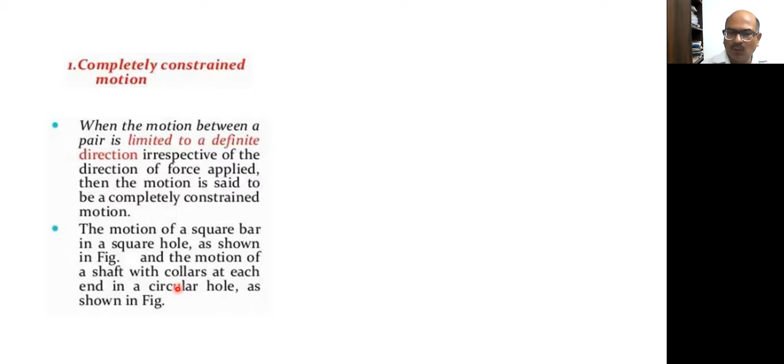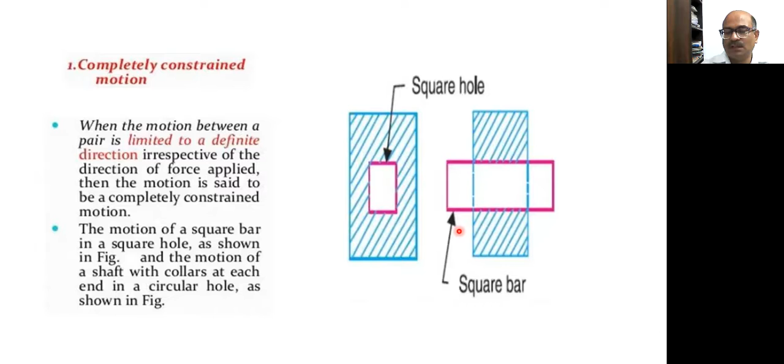If an object is there, but the motion between those pairs is limited to a definite direction irrespective of the direction of the force applied, whatsoever force we apply, that object will move only in the direction in which it is fitting, like this pen example. If I am fitting this cap on this pen, whatsoever the direction of force, the motion of the cap on the pen will only be in this direction. That kind of restriction is called completely constrained motion. For example, the motion of a square bar in a square hole, as in the figure. The square bar can only move to and fro in this direction; it cannot rotate, because it is confined by the shape of the hole. So restrictions are available, but motion is possible, limited to a definite direction.

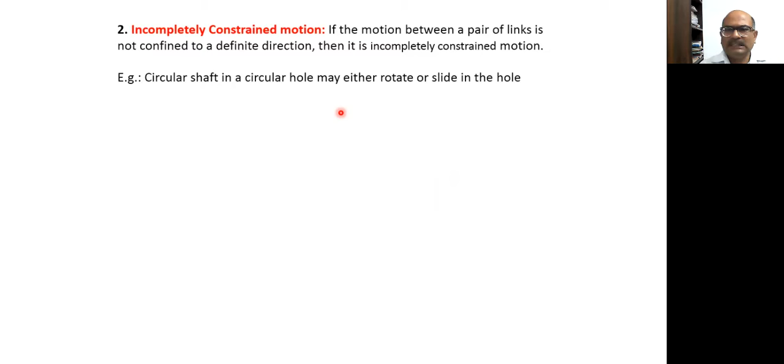Now, incompletely constrained motion is when the links are not confined to a definite direction, like a circular hole with a shaft put in it. You can understand that if the circular hole is available, the shaft can rotate and also move in this direction. This type of motion is known as incompletely constrained motion, but it is restricted in this direction because the shaft cannot move here and there, though it can move to and fro as well as rotate.

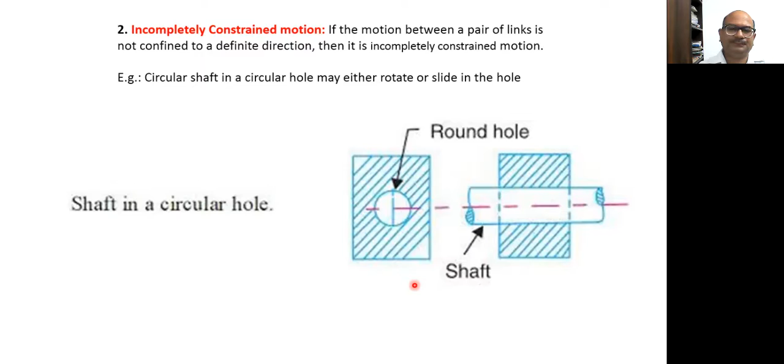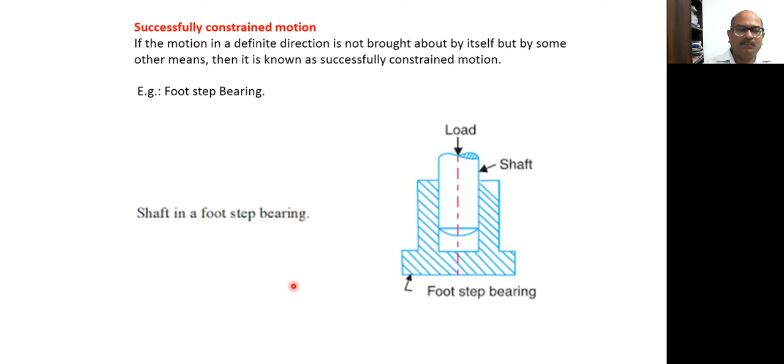The constrained motion, what we have come up to, is that there are certain restrictions due to which the object's motion can be controlled, and the motion in one direction or the other can be seen accordingly.

Now, according to the directions available and the possibility of movement of that object, we can define a very important parameter known as degree of freedom. These are the minimum number of independent variables or coordinates required to specify the position of a dynamic system. You must understand this.

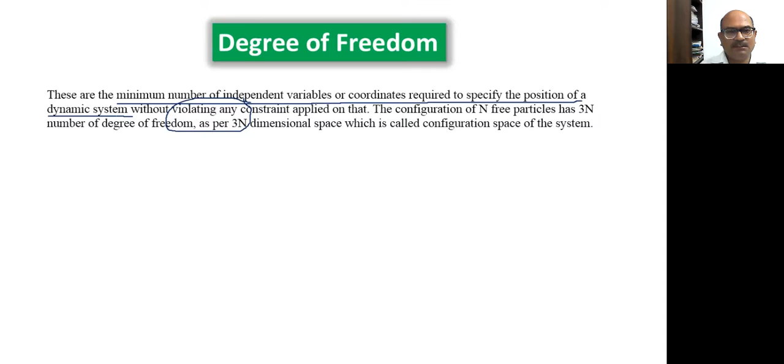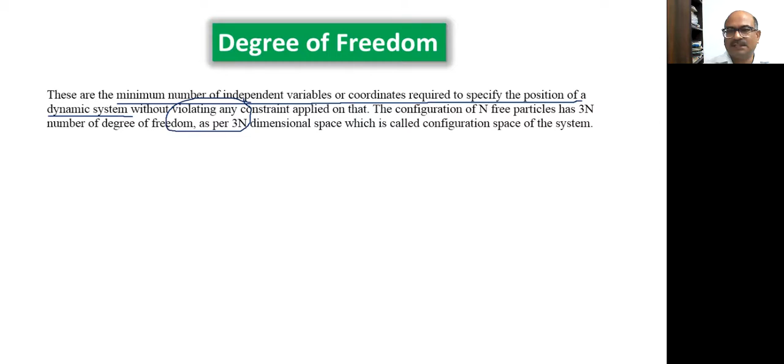So these things you must identify. The condition is without violating any constraint applied on that system. The configuration of n free particles has 3n degrees of freedom as per their 3n dimensional space, because if one particle is available, there are 3 directions available, so there is 3 dimensional space available for that. One particle can move in those 3 directions, but if n number of free particles are available, they can move in 3n space, which is known as the configuration space of that system.

How many particles are available accordingly identifies the configuration space. The number of coordinates required to specify a dynamical system becomes less when any constraint works on that system, because suppose we are restricting the motion of a particle in the x direction - the particle cannot move in x direction, though x direction is available. So there are only y and z directions available. There are restrictions, and accordingly the degree of freedom is reduced.

So we can define degree of freedom of a dynamical system as the minimum number of independent coordinates required. This is an important part - degree of freedom of a dynamical system as the minimum number of independent coordinates or parameters required to specify the system with constraints.

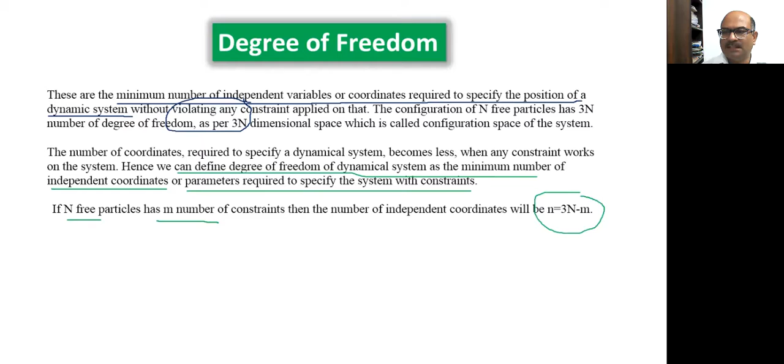And if n free particles have m number of constraints, the independent coordinates will be 3n minus m. So 3n is the total number of available spaces, available coordinates, available parameters in which a particle can move, and small m is the restrictions available. Accordingly, the total number of free spaces are reduced. For example, a particle in space has degree of freedom 3.

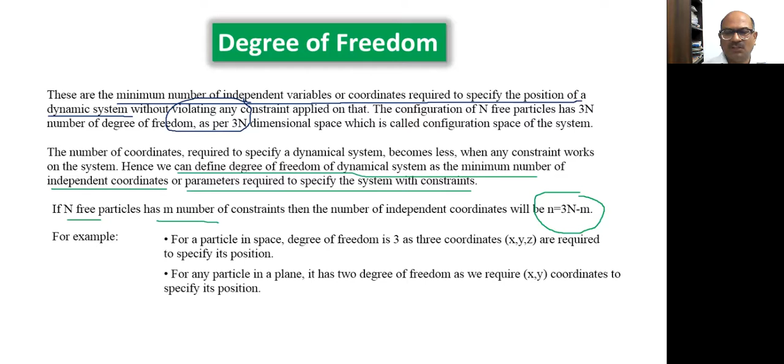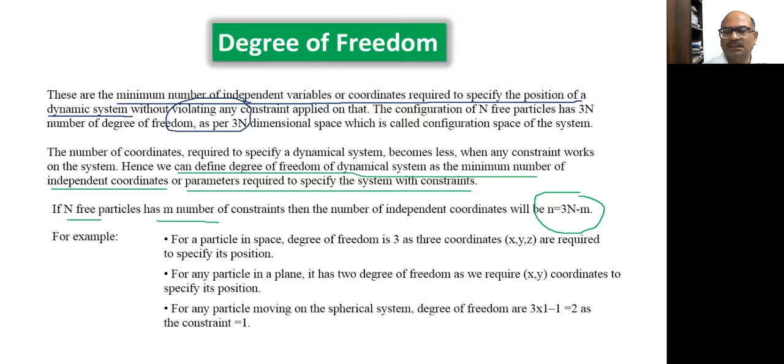For any particle in a plane, it has 2 degrees of freedom because the third parameter is restricted. So 3 minus 1 is 2. But for any particle moving on a spherical system, degree of freedom is 2 as the constraint is 1, because on the spherical system it cannot increase or decrease its radius. The restriction is available on the distance of that particle from the center.

We can understand this in an important manner - if the particle is here, where can it move? The particle can go up and down, left or right, backward and forward. It can roll, it can take a pitch, and it can take a yaw. So let me identify what all these things are with one example.

I hope you are seeing this pen. If we consider this as an object, if the motion being considered - it can move right and left like this, it can move this way, this way, this way. So this is a simple motion.

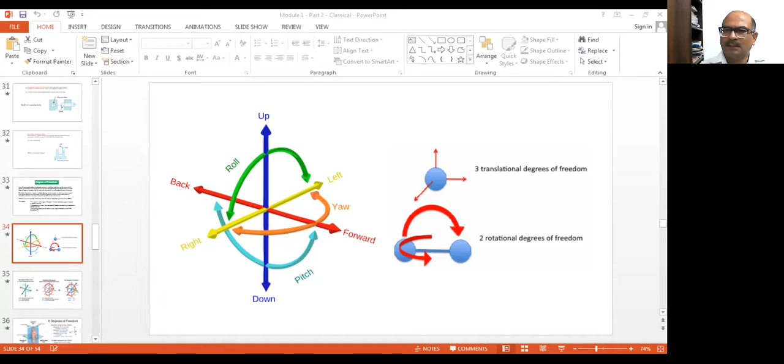Already we have seen this, and we can understand that if a particle is at the center, it has three translational degrees of freedom, like this movement, and two rotational degrees of freedom. One is like this, and one is like this.

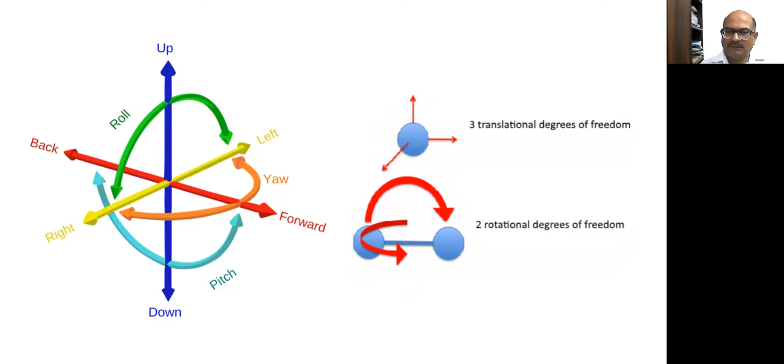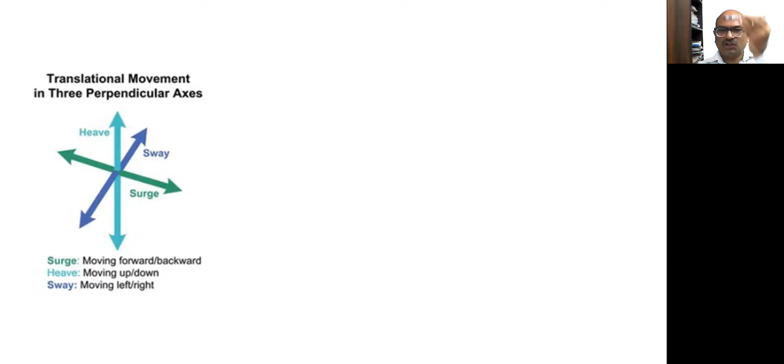If we see the translational movement in three perpendicular axes, it can be taken as surge, moving forward and backward; heave, moving up and down; and sway, moving left and right. Consider this the translation movement in three perpendicular axes: surge is moving forward and backward, heave is moving up and down, and sway is moving left and right.

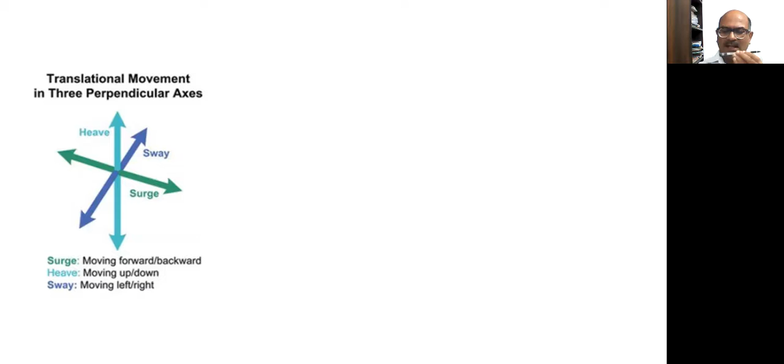In addition, there are rotational movements about three perpendicular axes. Rotational movement in this direction, this direction, and this direction. If the rotational movement is like this, it is available here, so if it goes in this direction, it is rolling. If it moves rotationally at that axis, it is pitch, and if it is like this, it is yaw.

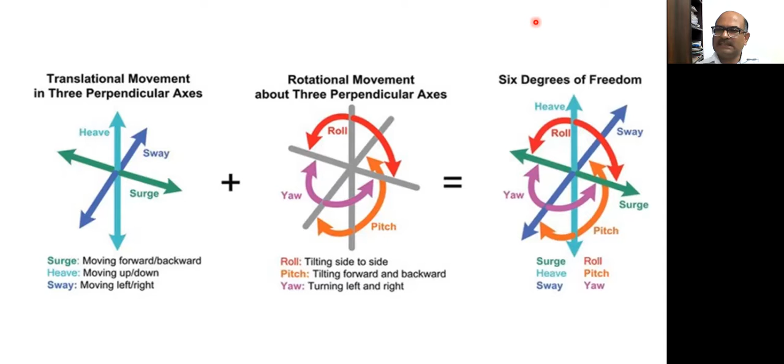Rolling is tilting side to side, pitch is tilting forward and backward, and yaw is turning left and right. This way you can understand there will be 6 degrees of freedom available.

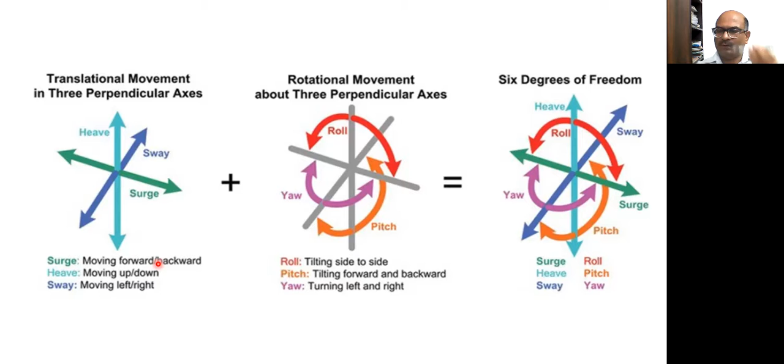Three for surge, heave, and sway. There is no rotation available here, so 3 degrees of freedom here, and 3 degrees of freedom for rolling, pitch, and yaw. This way we can make out the degrees of freedom.

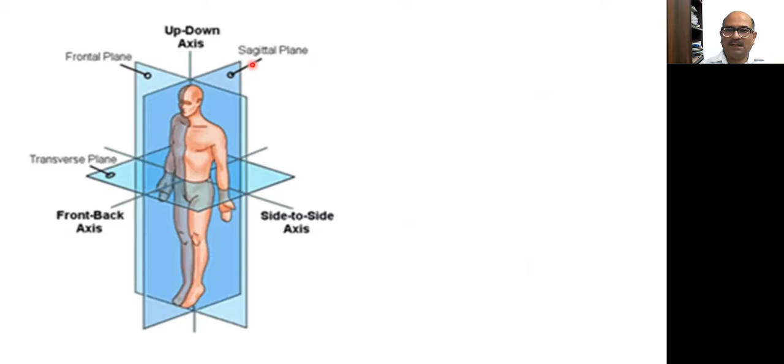For the human body, if we consider the up-down axis, side-to-side axis, and front-back axis, we are having a transverse plane, a frontal plane, and a sagittal plane. Accordingly, we can define movement along an axis, 3 degrees of freedom: along the side to side axis, along the front back axis, and along the up down axis.

It can take like this, and like that movement. That kind of movement along the 3 axes is available, and because it is a linear movement, this distance can be measured in inches, feet, or meters as the unit of distance.

If we rotate standing over there, again 3 degrees of freedom are available. If it moves around the side-to-side axis, bend forward, backward; around the front-back axis, side bend; and around the up-down axis, open closed. So this is angle, because it's an angle, measured in degrees or radians.

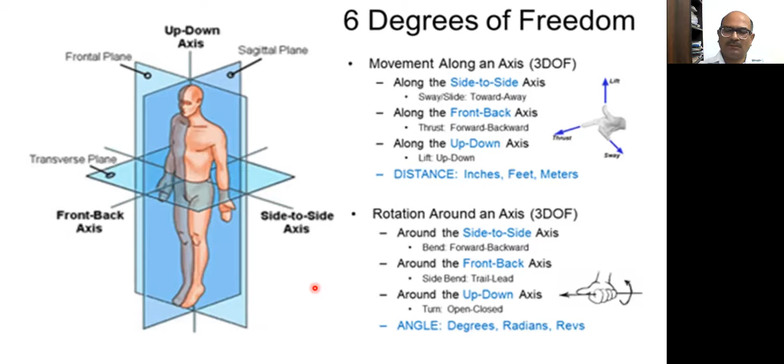As the unit. So in the same manner, we will be having 6 degrees of freedom, and in the same manner in our hand, let's see how you can move your hand.

If you see your finger, it is available to move only in this movement, this or this—it can rotate, but it cannot rotate here. So you can rotate from here, but not the finger itself. Same with this finger, same with this, and all the fingers.

But over here, at this point, this movement is available and this is available—rotation is available, and this type of movement is available too. This is available, you can see here, this is available and this is available, but you cannot rotate.

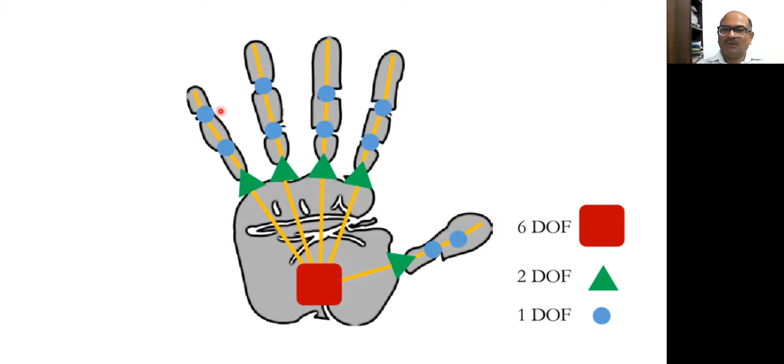At this point here, this is available, this is available, this is also available. So at this point we are having 6 degrees of freedom—it can go in any direction, any type of motion. At this green point we have 2 degrees of freedom, because we can move in only 2 directions. But in the joints of our fingers, we cannot move in more than one direction, so only 1 degree of freedom is available.

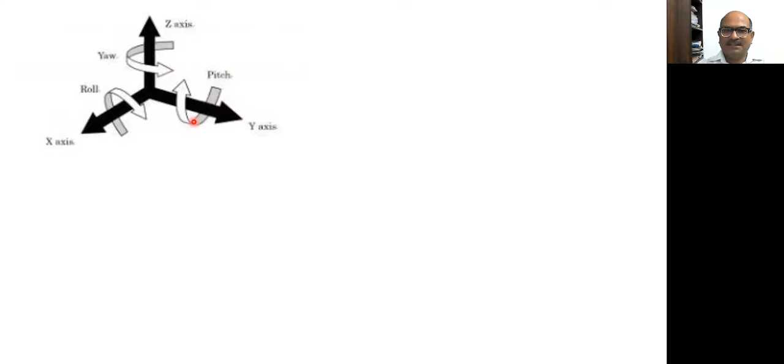I think it's very easy to understand how degree of freedom is working. Again, we can see here, this is rolling in one axis, this is yaw, and this is pitch.

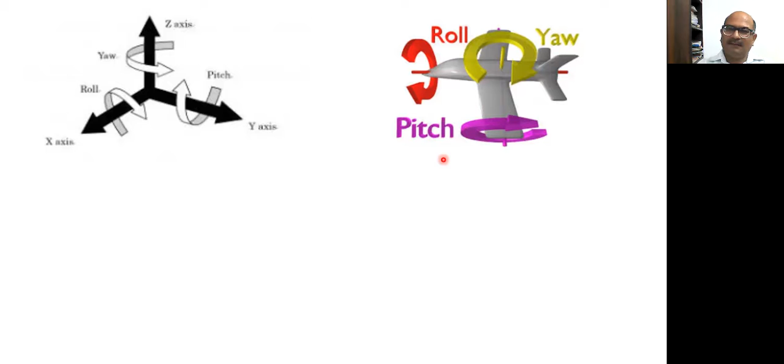If we see this with the example of a plane: rolling is when the plane takes a complete revolution about its axis passing through its length, pitch is when it moves about its wing axis, and yawing is when it rotates like this. In the air, when the plane is moving, these types of rolling, pitch, and yaw can take place.

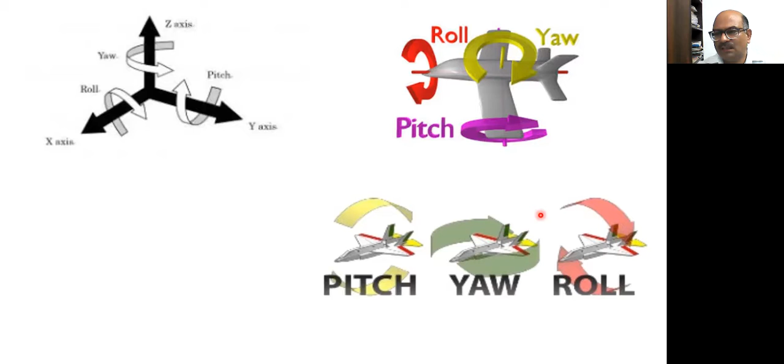You can understand here by 3 different pictures: this is pitch when the entire plane is rotating, this is yaw when it is side by side rotating, and rolling when it is rotating around the axis passing through its length. So we can have 3 degrees of freedom if we are measuring total head rotation and tracking with pitch, yaw and rolling on XYZ axis, and there is no depth in the room.

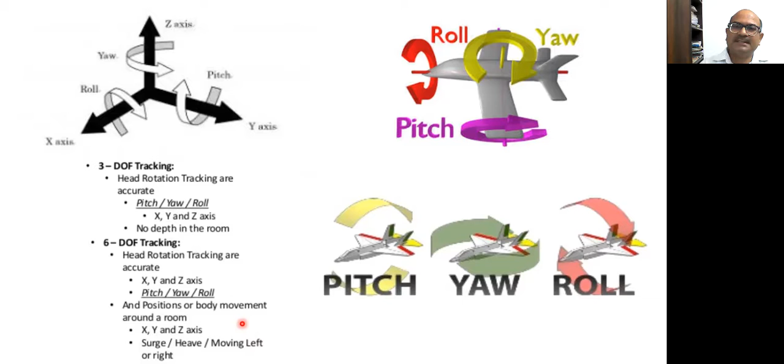But in 6 degrees of freedom tracking, head rotation tracking is accurate, along with positions or body movement, because these type of things are now taking place in virtual reality, where we are designing different games, and fixing sensors to see the head movement, hand movement, or body movement of the participants there.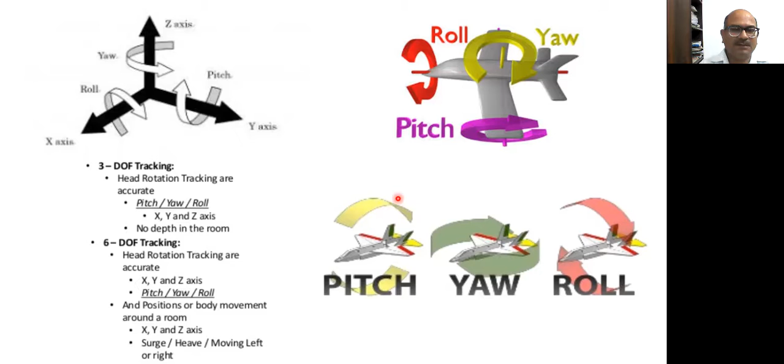Whenever a video or a game is being developed, the software actually takes care of the movement. Let me show you once again.

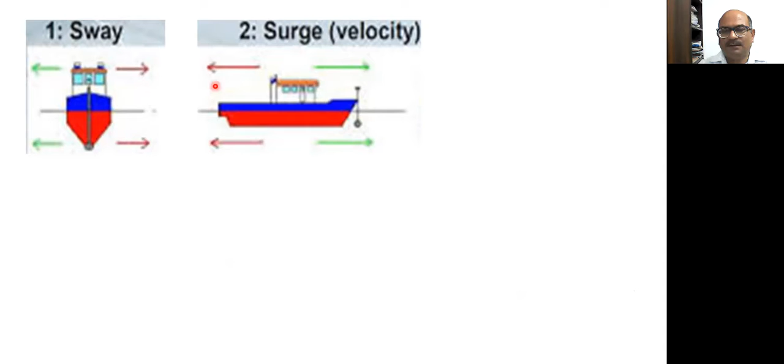If a boat is there, and it is moving here and there in this direction, it is sway, but if it is moving ahead and backward, then it is surge, and if it is moving up and down, then it is heave.

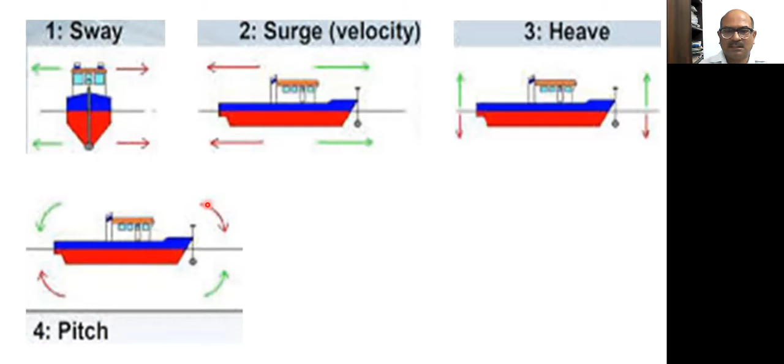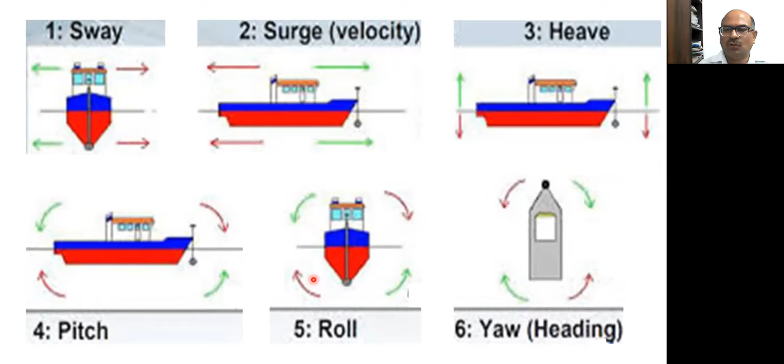And if it is moving like this, then it is pitch. Like this, it is rolling, and then yaw. You can take it that it's from the front if it is rolling. So I hope all 6 things are now clear: sway, surge, heave, pitch, roll and yaw. You can take care of this properly.

Now I can show you how in development of a game you can see the 3 degrees of freedom tracked by goggles. The goggles are there and the sensor is available. So if we have a goggle and move it here and there according to head movement, like this, the sensor governs the 3 degrees of freedom: this is pitch, rolling, and yaw. So a sensor is there.

If movement is being taken care of, forward like this, left to right, and up and down, these kinds of movements can be taken care of by another sensor, the external sensor.

So pitch, roll, and yaw can be calculated using a goggle attached to the object. But an external sensor is required if we are changing the position, like moving backward or forward. These things are important, and yawing, rolling and pitch are considered in development of games, and the participants wear those sensors and goggles when they develop the games.

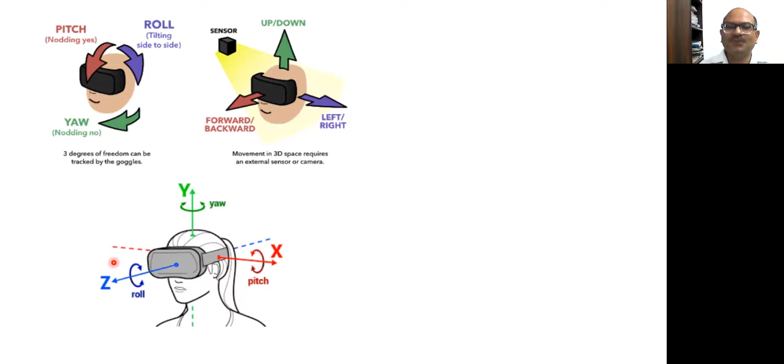I hope you have seen many games in which the participant is moving here and there, and according to the movement the second participant responds. That is basically possible due to all these things.

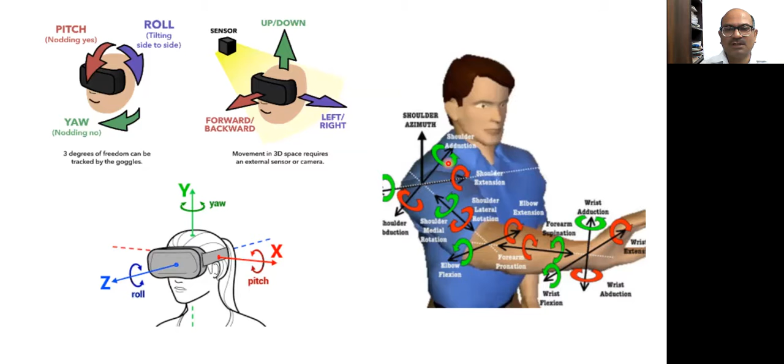I've taken one picture where all body movements are possible: the hand, shoulder movement, elbow movement, wrist movement, finger movement, all are possible. These possible movements are tracked by sensors and devices attached to the arms, and accordingly in the software and video, what you are seeing is the object's information, the movement information collected using those sensors. So degree of freedom is actually used here to find the possible ways in which an object can move.

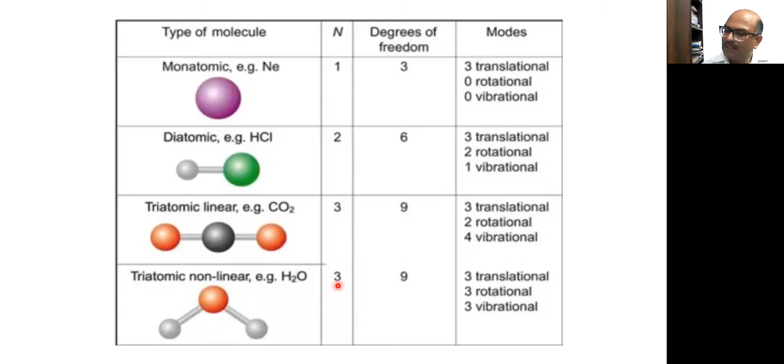For a triatomic linear molecule, there are 3 particles and 9 degrees of freedom: 3 translational, 2 rotational, and 4 vibrational. And for a triatomic non-linear molecule, again 3 particles, but translational, rotational, and 3 vibrational degrees of freedom are available. This way we can calculate and find the degree of freedom.

In my next class, we will have further discussions and a few numericals on how to calculate degrees of freedom. I hope all of you can now see that degrees of freedom play an important role in the development of software, games, and anywhere animation is taking place.